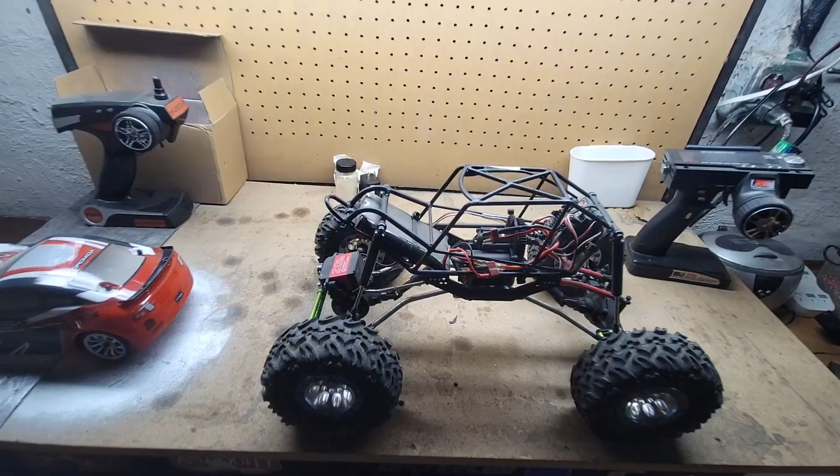If you guys can see, I've built many things. I love building stuff from the get-go to the very end. Many projects don't get finished, but that's not how I do things. I love to finish projects. I love to get half-done projects, like the mini bike. The mini bike that was just right here, that was a half-done project that was not going to get finished until it came here.

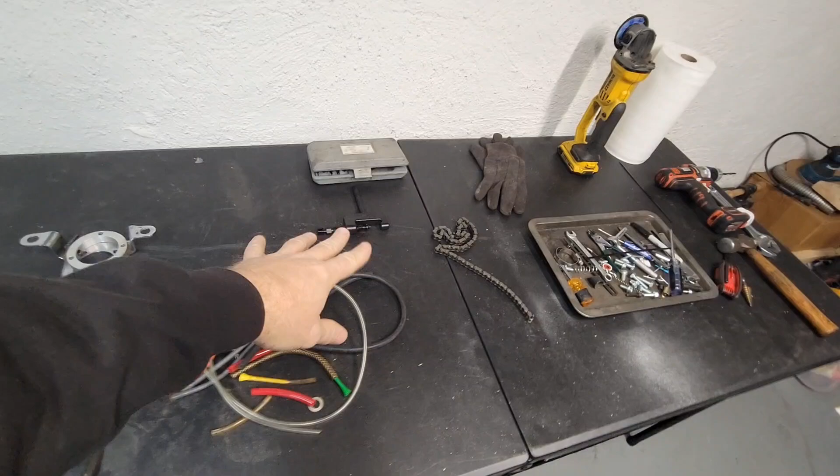It got finished. And actually, looking over here on my table, I still need to put some goodies away. This is the last job here I had to do. Got my Motion Pro chain splitter, went ahead and split the chain, got it laced up. It's all good to go. You know, the bike's outside finished. It's awesome.

Digging through more stuff, and you know, we've kind of had some ideas. That's kind of why we're here. Wanted to do more outside today, but the snow went ahead and shut that one down. So, let me just kind of show you guys what I've been working on, because there's always something brewing in my brain. Always. Even at times I don't really want to, but there's something working.

And I've just kind of learned to just build it and get it out. And now I film stuff for you guys. And thanks for watching, thanks for tuning in, some jobs out of town. Let's sip some coffee and show you guys what's next.

And it's something cool, and yeah, I even got my wood rims out today. Oh, got my hat on. Yeah, when wood rims go on, we're thinking, we're deep in thought. These are the ones I can see real close, and I can do this.

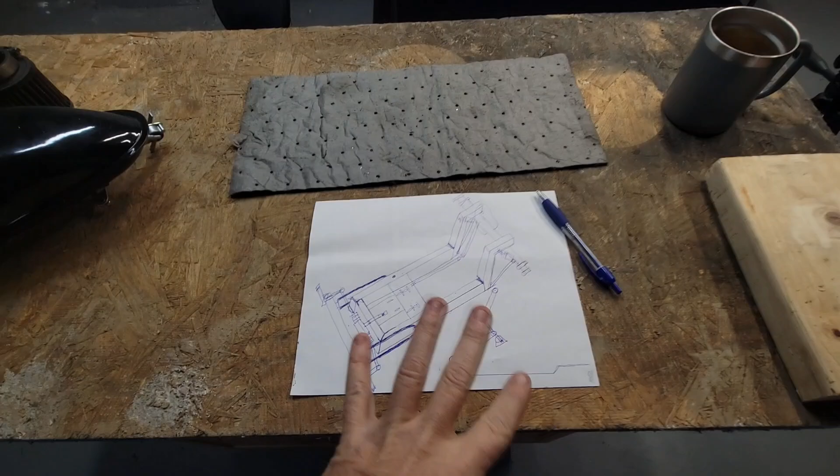We're still in planning here, guys. And this is really what I wanted to go outside and do today. This is the new gas tank for the chopper that has the petcock on it.

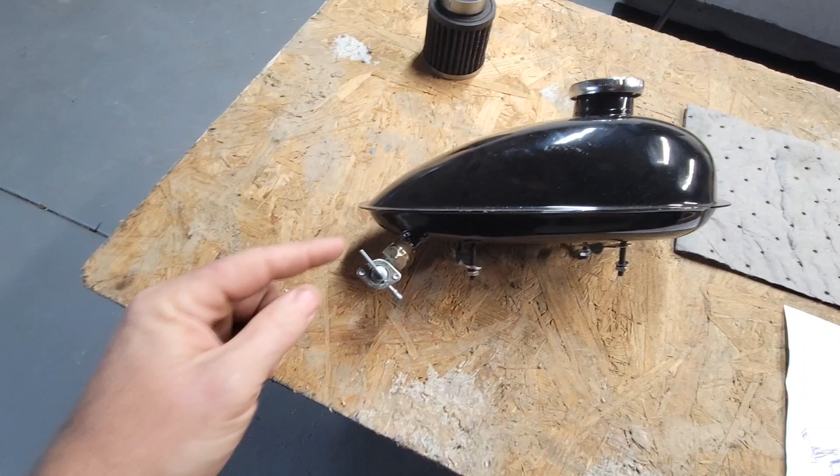So this is going to get installed with the petcock, and it has a reserve and a main, so it goes up and down and goes back, and I think it should clear on the frame because it tucks in there real tight. So we're going to see. That's really what I wanted to check, was if this is going to clear on that frame, because the fitting I have in there is real close.

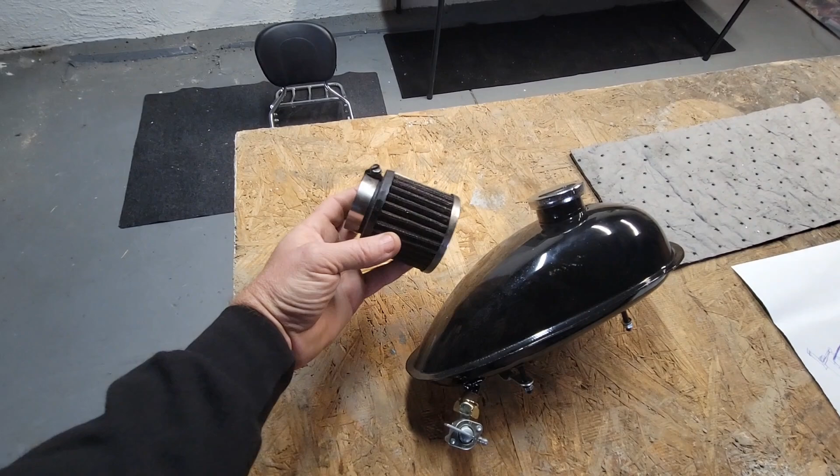And then I found this needs to get installed on there too, because it was running just a bit lean when I was wide open throttle. I can always tell if you're at half throttle and it's pulling good, and you give it wide open throttle and it pulls less, it's too lean. It's getting too much air. And the engine was still running fine, but it was losing power the more I gave it.

And the air filter will control that. It still lets some through, but it makes the tune more even, if that makes sense. The carburetor essentially is tuned with the air filter from the get-go. So the more restrictive filter you have, the more fuel you will get. The less restrictive filter you have, the less fuel you will get. So more air, less fuel; less air, more fuel.

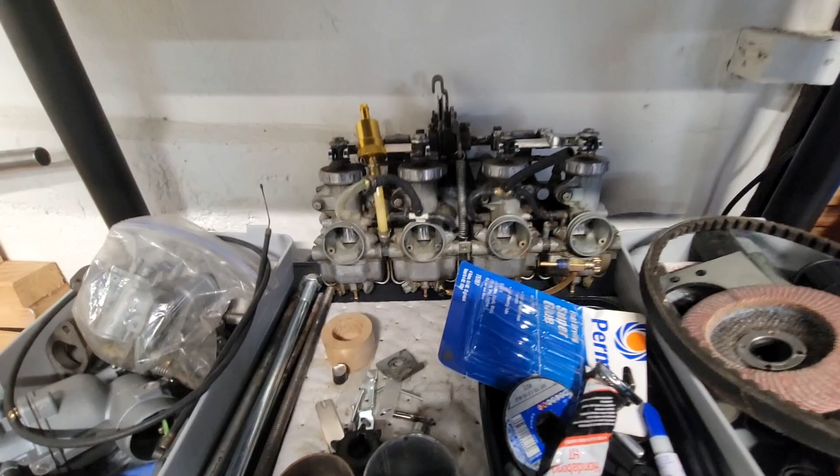Does that make sense? The choke, on some older carbs, just restricts all the air, so you get nothing but fuel, which is good for cold startups. You kind of need that. So there's the new carburetors, the newer style. There's a couple of them over here, I think. Well, yeah, I mean, the Honda carbs here, they're a bit different. They use an enrichment style. They don't really close off the bores.

They use an enrichment that enriches extra fuel into the system, and it has sliders that can completely close the system, but that will really do nothing but flood the bike. So you got to be really careful with those. Really, you close them to about right there and you're usually good. If you close them all the way, you'll flood it instantly. So usually you keep those open and just barely restrict a little bit, gas them up, and you're good.

And that's why these older carbs were not easy to deal with. Many people had problems with them.

I've tuned, I was going to say thousands, but it's way up in the hundreds. I've tuned many banks of those 4-cylinder carburetors, not just Hondas, Kawasakis, Suzukis, many Ducati setups with the 4 carbs on top in a V pattern. Not fun. V45 Hondas with the V engine and 4 carbs on top, 2 facing this way, 2 facing this way, those not fun. Honda Gold Wings, they're on each side, oh it sucks, no fun. Honda Valkyries, no fun, there's 6 of them.

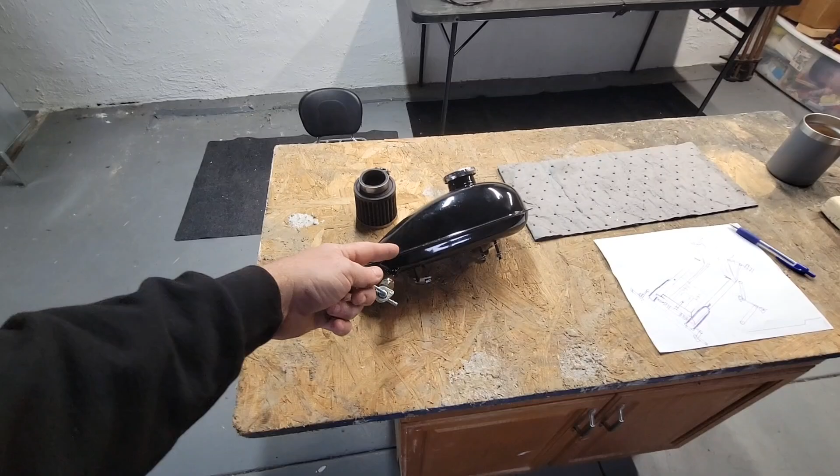Yeah, want to get that finished up, and really we should be good here, because once we restrict that little bit of air and we get the fuel flowing to it, it's all going to be good. It's going to be real good.

Yeah, so the next project.

Let me just get you guys tuned in here, and I'll give you a full breakdown as to what's going on here. Let me get a little more sip of this Black Rifle.

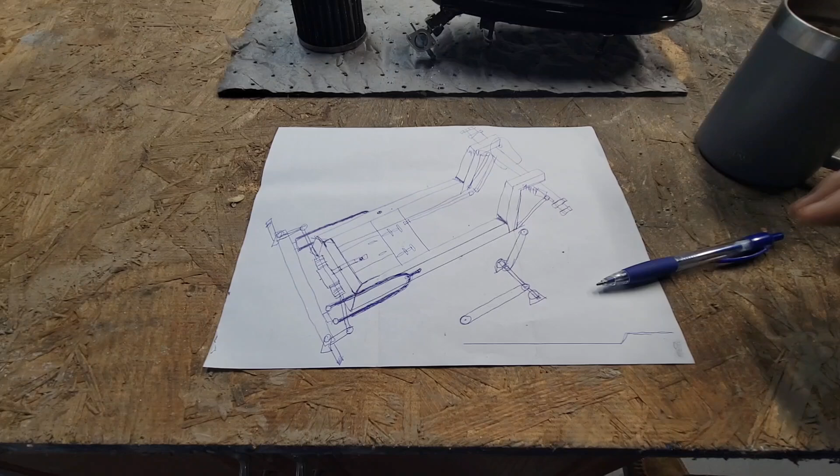Okay guys, got everything somewhat tuned in here. Hope you can kind of see where we're going here, and there may be many questions right from the get-go.

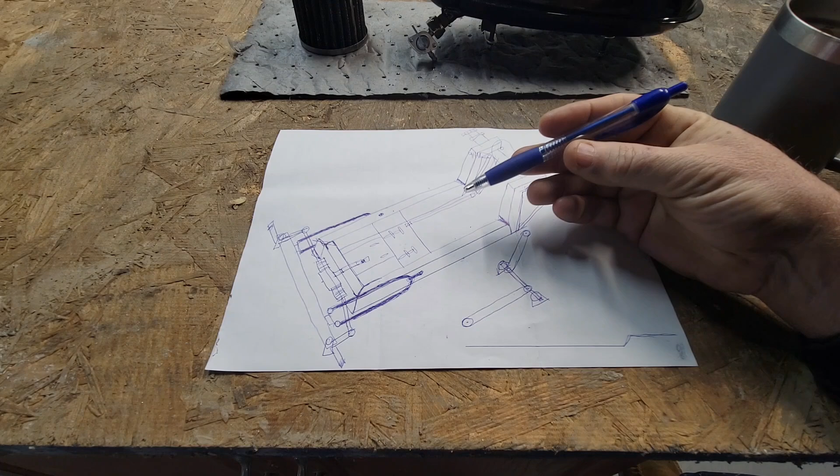I'm not a fan of computers or CNC or really any of that. I have a beautiful blue pen that works great, that I can turn on and off anytime, and a piece of paper - this one I think I paid for because it's an old bill, but it's the back, essentially free paper to me, whatever.

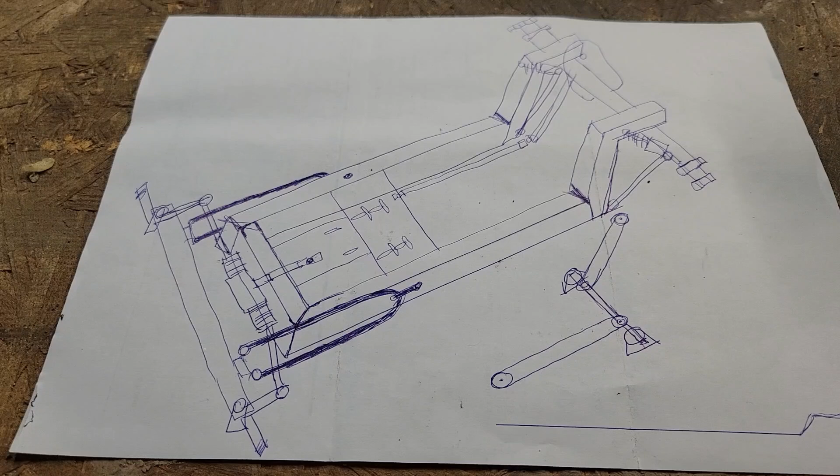Let me tune you guys in here, get you squared up here. Oh, there we go, okay. So we're going to start here. I know my drawings are not the best, I do what I can. Let me turn my machine on here.

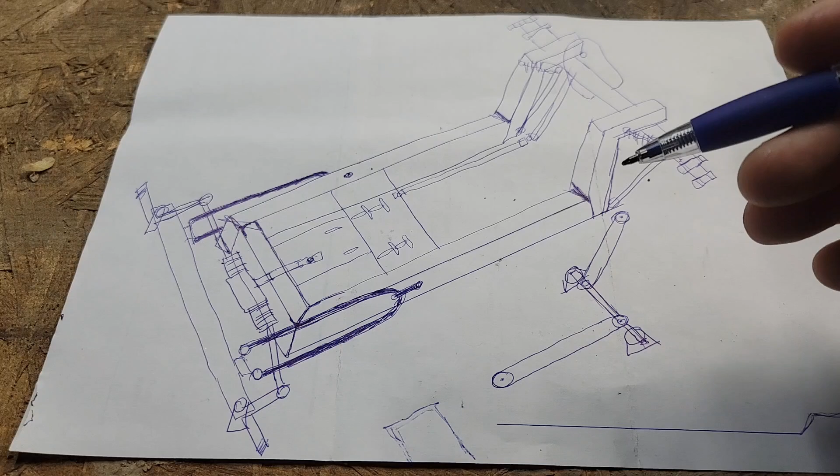So to start, essentially it's going to be, let me see, it'll be right about here, you know, in theory. And really I'm still drawing all this to figure out my parts. I know what I want in my mind, but I need to know all the parts and details I need to get figured out for my front axle, my hairpins, my frame, all my goodies, so I can get my parts diagram figured out, because none of that's been figured out ahead of time. I'm designing this from scratch.

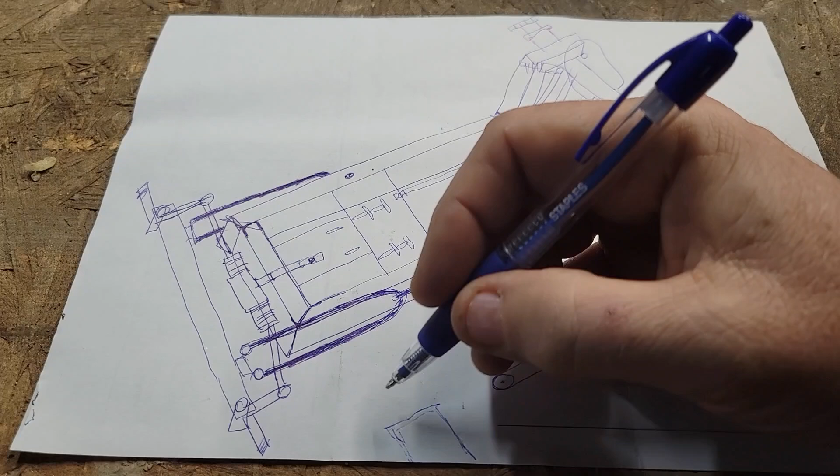So essentially we're going to start here. This is the engine, you know, engine, spark plug, bowl, exhaust, having fun over here.

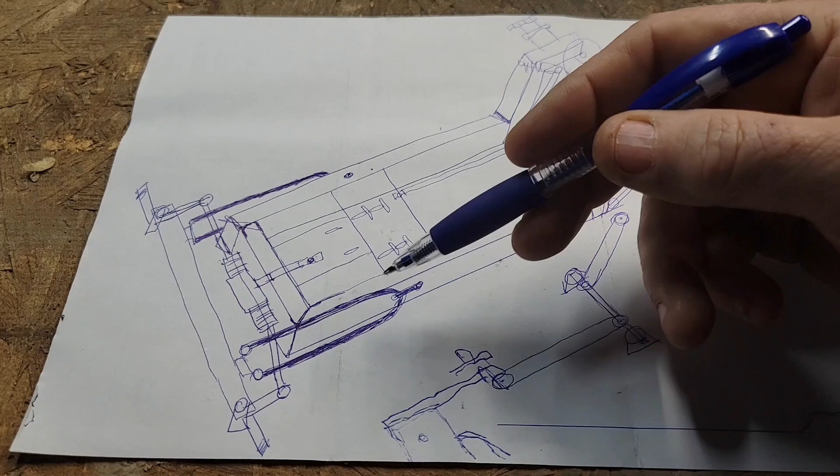So, belt drive there, rear sprocket. You know, belt drive is going to be here on this side, or it's kind of in thoughts - I'm just thinking about it right now because this may actually be the other way too. I'm just laying it out in my mind. So we can change all this when we actually weld up the frame.

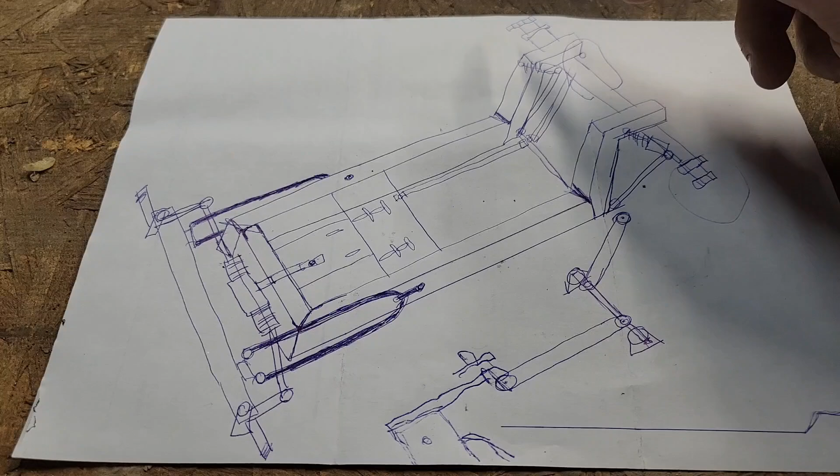So the chain is going to come straight back to a jack shaft, which is going to be right here. It's going to be essentially at the bend of the frame where it comes up to go over the rear axle. There's going to be tires here, tire there, tire on the other side, tire here, tire here.

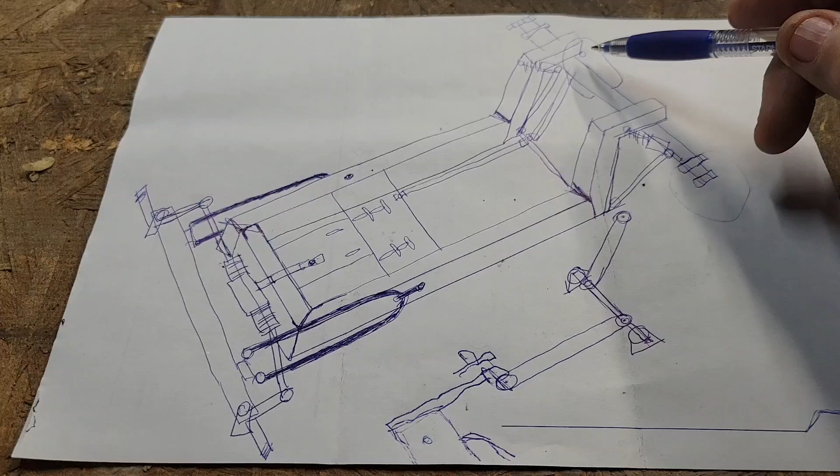Power is going to get sent back through my chain here, across my jack shaft, spinning, spinning, spinning - or it's going to be spinning this way. So across my jack shaft, spinning my chain this way, and then it's going to be coming into the side of my rear end. Let me turn this here a little bit so you guys can get a better view there. The rear end is going to be...

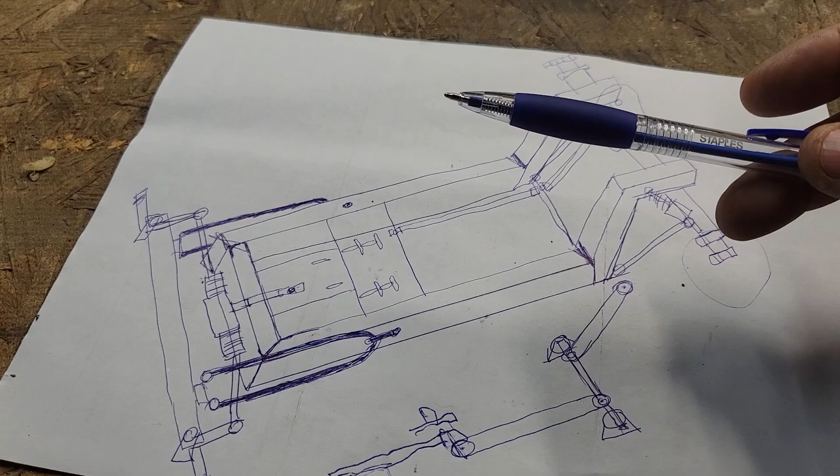A couple pegs here, it's used - you know, we're sorting all this out. Once I figure this out, I can get a brand new one to go in here. So, but this one, good deal.

It's local, the guy was taking his apart. He said the diff and rear end is in awesome shape, the tires are just covered in mud. But it comes with the tires, the rims, the rear brakes, the diff, the leaf springs, the hangers, many parts. So yeah, that's good. And if this all works out great, and we have any problems with that diff, we can get a brand new one to bolt in, so that's not a problem.

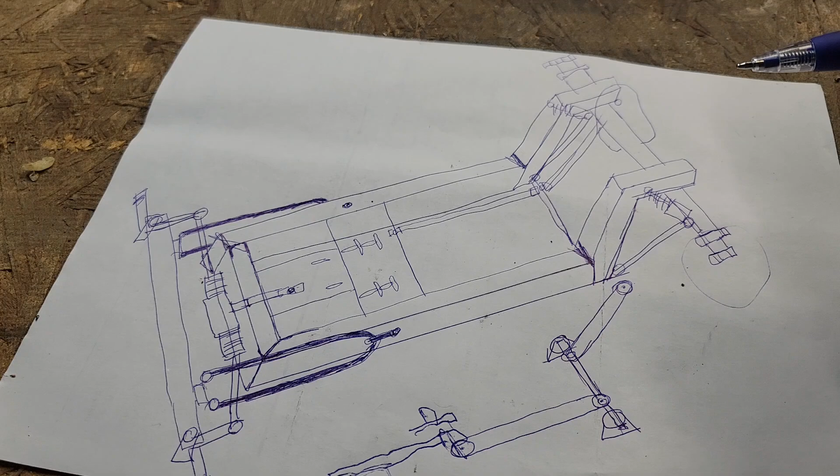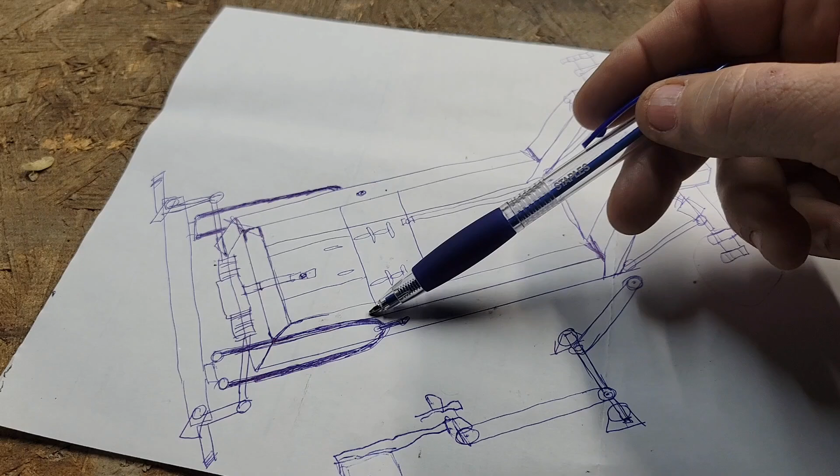The front axle up here on the front - I'm kind of wondering too, and I was just looking at parts. It's a Milex rear axle, but that's actually for an EZ-Go. Many EZ-Go golf carts use the Milex parts. So I'm looking at the front axle too, and I want to be able to tie in with hairpins because I want this to look like an old hot rod.

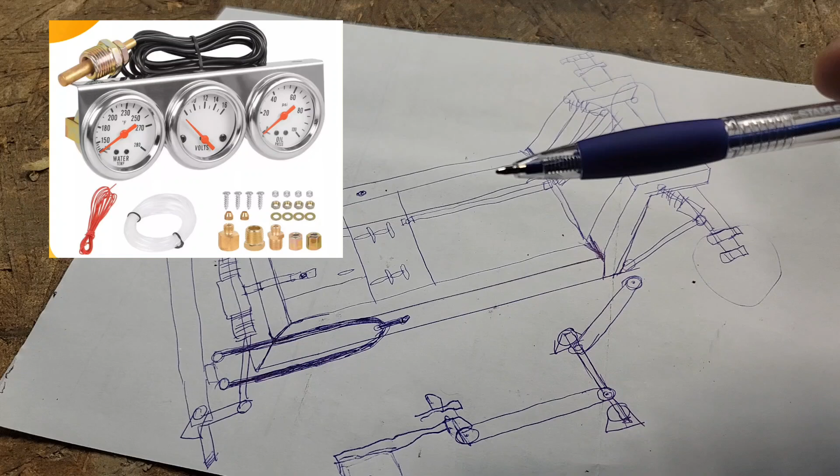Not quite like that, but we're going to do mine a little more fancy. I'm thinking maybe some rear fenders, the tub cut out with a proper dash. I want a dash with working gauges.

I used to build hot rods, guys. I've welded many Ford custom hot rod frames, chassis. I used to build rolling chassis for customers, they would put their own bodies and goods on them. Half the time they would come back so I could finish them. It was okay, I love seeing them come back. Anything you've ever worked on, it's just good to see it still together. But that was way back in the day.

I did it for several different companies, not for myself. I've done other stuff for myself, I've built many cars - not for myself, for my own business, for customers. I've never been able to afford a car for myself. I've always built race bikes, old Hondas, because they're kind of cheap and I can really get into them and do whatever I want. I can put a whole new engine in. It's really why all of this is happening.

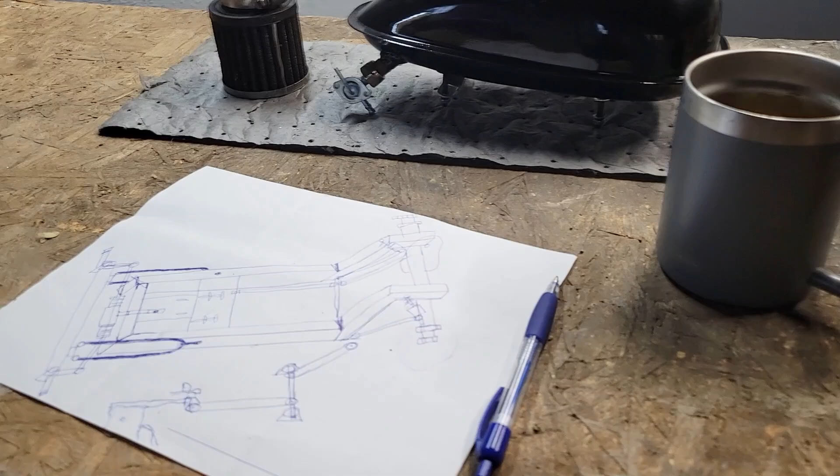Yeah, I'm eventually getting everything all laid out. That's just trash, never mind the trash. But this table and all of this arrangement is going to be used for something totally different.

It was supposed to be happening, but everything got put on hold because of this weather. The new engine is getting built right here. It's going to be a CB 862 high boost race engine - low compression, lots of boost, a big gnarly camshaft. It's the engine we started with that I did some tuning with from the get-go, and then realized I needed just more stuff because that engine's first gear is broken.

It's coming apart right here, 100%. We're tearing the cases apart, figuring out what's up with that gear set and getting it fixed right here. Can't wait. The mini bike was just because I found the parts, but we're going to build way more mini bikes down here too, because I can't wait. I'm ready.

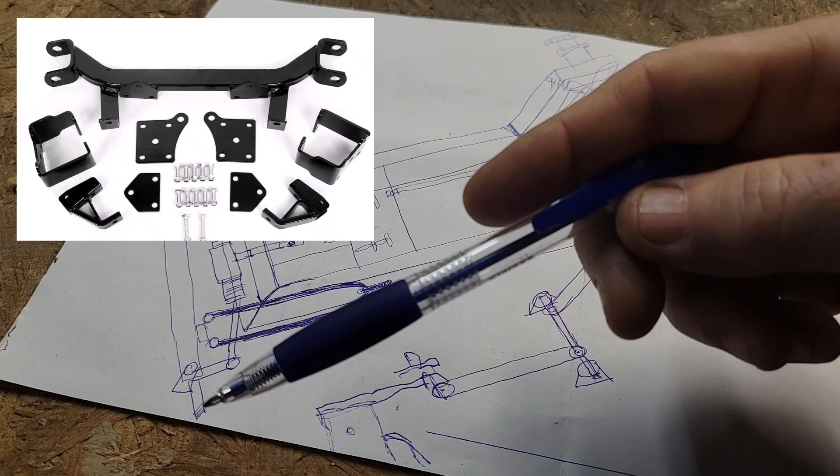But okay, back to here. So up here on the front end, looking at the EZ-Go parts for the back, I can get an EZ-Go front axle that is actually a good axle that has the good kingpin, the good spindles. I can use the good spindles on it, and I can make my own hairpin mounts because it's set up for leaf springs, and I may be able to use the leaf spring mount here, be able to move the mount and have a leaf spring that comes back to my chassis on each side.

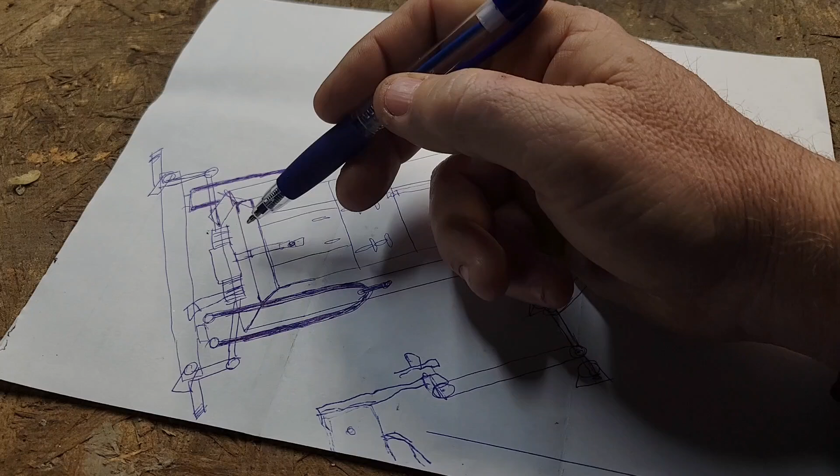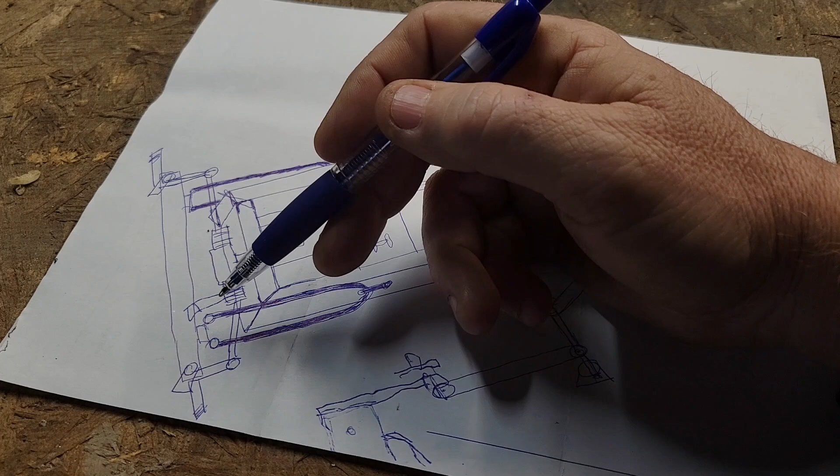I haven't really figured out the front suspension, or what's going to hold it up. The suspension is going to be the hairpins - that's going to locate it, and I may have the stubby leaf spring coming out of the bottom of the frame that will support the axle from the bottom and kind of be hidden, because this is a steering box that's actually for a go-kart. So I can have the steering box in the middle with arms that go out to the side, so I can have suspension that goes up and down, and that should work great. And I can be able to put the steering shaft back to wherever we put the tub.

And I want to kind of build the frame like this, because let me just kind of - it's going to be kind of like that.

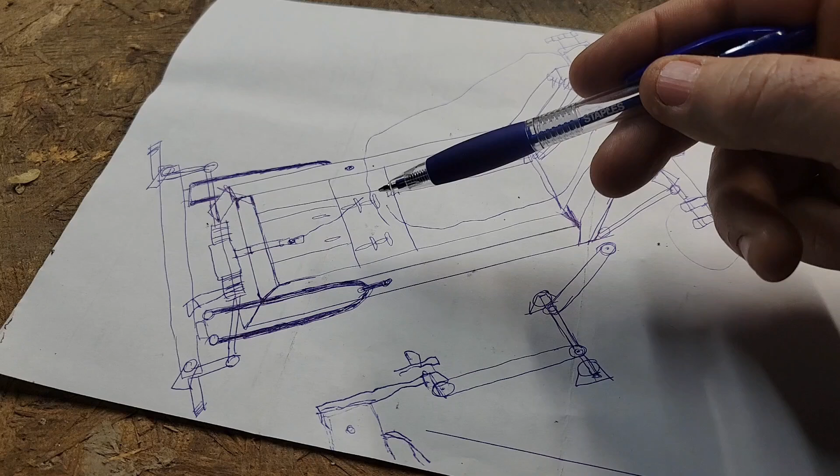This will be the wheelbarrow tub, which will be on the back where I'm going to sit. There will be a seat right here in the tub, and I want to find a nice steel one so I can cut the front off. You cut the front of the tub, rotate it up to where it has a front end dash, and I can put a dash panel in. I think it'll look cool because the engine will be up here with the turbocharger sticking off the front, and it'll all be open since I don't really need a radiator or cooling system.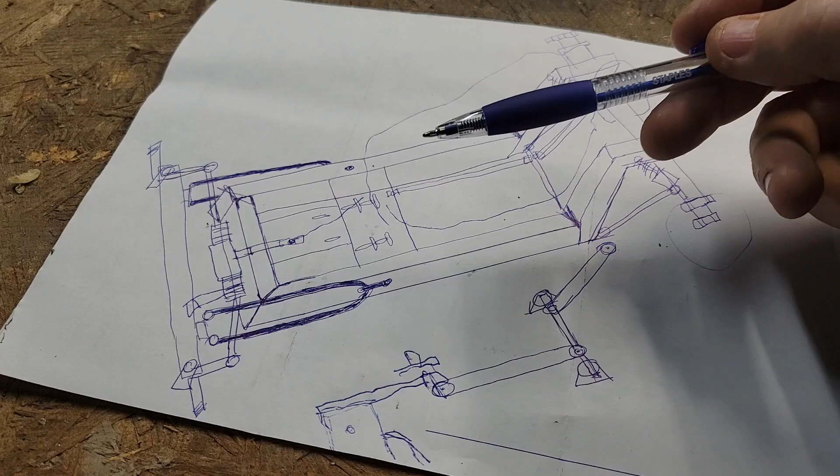So I may put a radiator hoop, just to have some support bars that come back to the front of my tub, to my dashboard essentially. The bottom of the tub, the frame will be fit to the bottom of the tub.

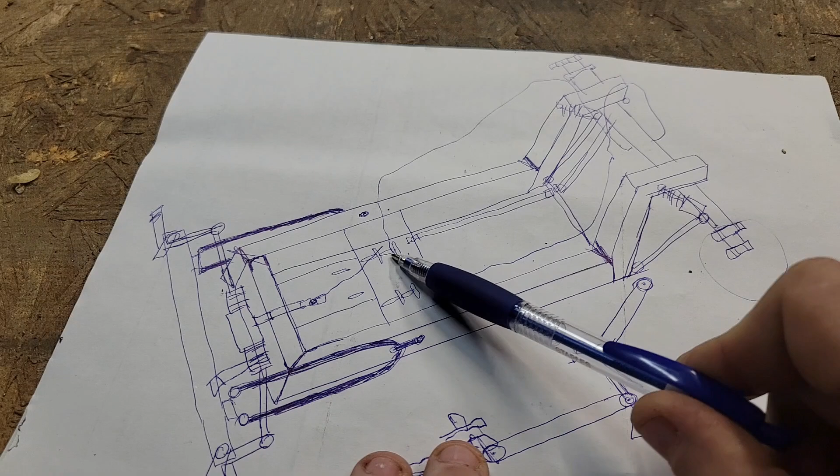The tub will come up over the back, and that's why my chain drive will come straight back under the tub, then pitch up where the tub comes up in the back. The chain will pitch up behind the tub, so the chain drive will be hidden under it, and it'll be safe because the chain won't be exposed at all.

And I think the rear diff, depending on the angle of the motor drive, is going to be good too. So once again, I just need to get it all laid out and figured out, and that's what all this is for.

The engine stuff is going to get moved down here so that I can custom build this frame outside, because it's going to need lots of cutting, welding, and fabrication. That happens outside. It's nice because I can kind of separate things now.

This is going to become the very clean, coffee sipping engine building shop, or final assembly area. It's what I did down here with the mini bike - did the welding and fab at Jerry's shop because my shop is full. He did the powder coat for me too, which was phenomenal, and all is good there.

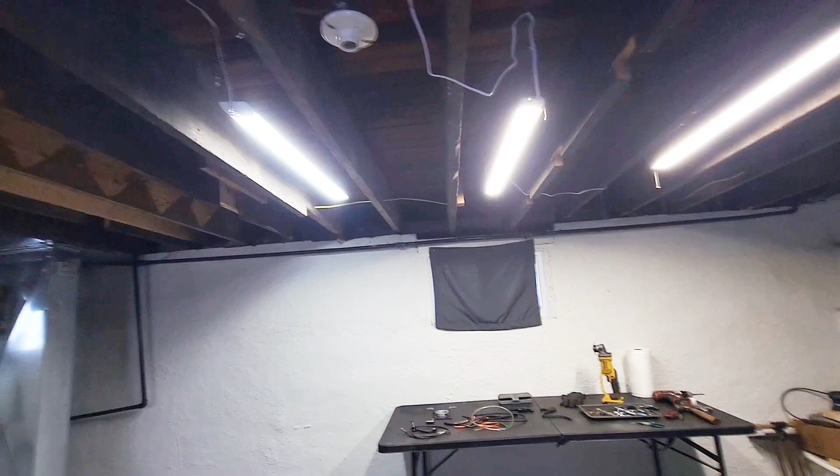That engine's going right here, and we're going to bust it down. That's why I got lots of light here now so I can see what's going on, and it's going to be good. I'm ready, we just need to get it moved down here.

Once this snow gets cleared up, my buddy's going to come over to help move it down here, and it's going to be good. I was thinking about getting a dolly and strapping it down to try and get it here, but now everything's covered in snow. Okay, glad we didn't do that.

I need to go make some more coffee.